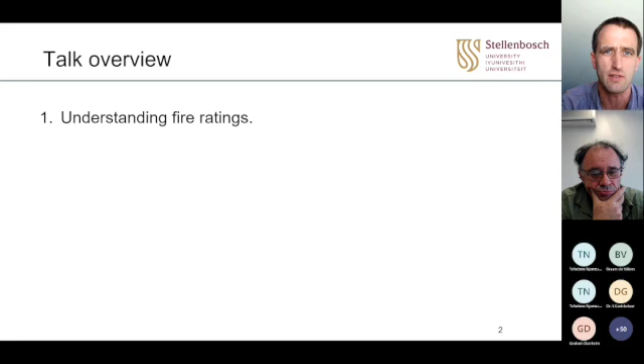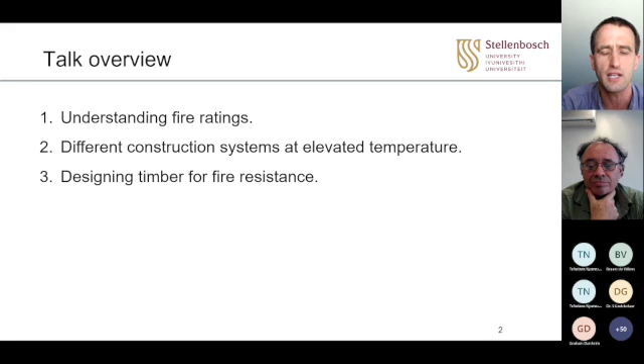So it's probably something many of you have had to deal with. As an overview of what we're going to look at: first, understanding fire ratings, because the first half of the talk is just, what is a fire rating, what are we actually trying to achieve? It doesn't matter what construction material we're using, but what is a fire rating? Then looking briefly at different construction systems as a comparison, then focusing on designing timber for fire resistance, so we can put it all in context.

In terms of additional content, we have a YouTube page, FireSUN, where various videos are available on testing and products and all sorts of things, so if you need additional content you're welcome to go have a look at that on YouTube. And we've got fire safety engineering at Stellenbosch University, with master's and PhD programs, courses, short courses, structural fire, fire behavior, fire safety engineering. We do research, consulting, expert witness, R&D, etc.

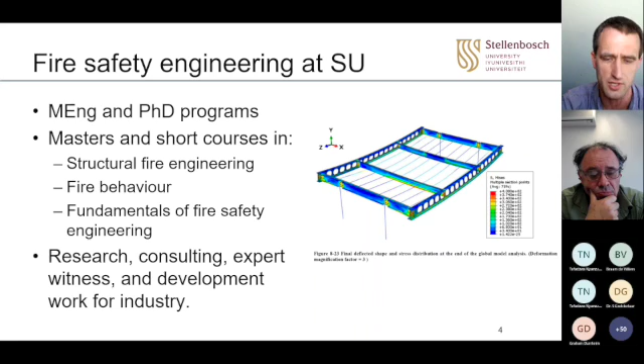As a background to this, if you want more details, a timber and fire textbook has recently been released free of charge - a free textbook on fire safety engineering for timber structures. This is written by many of the top experts in the world, pretty much the who's who in structural fire and timber, published free of charge. So you can go download that if you need any guidelines, but it's 486 pages of light bedtime reading.

So the couple of slides I'm going to give you today is a really, really fast introduction to a fairly detailed topic, but there are extensive guidelines being produced to help this issue. Firstly, my background is a structural engineer, and I know on these sorts of projects, as soon as you have timber, you have fire, the structural engineer says, well, that's not my job.

Yeah, that's the fire engineer's job. But if we have a look at the codes and standards, when it comes to structural fire resistance, making sure the structure has sufficient resistance, the fire engineer is involved with that in terms of specifications.

But our code that specifies what the structure has to do, SANS 10160, is the code of practice for structural design. This code specifies that we should design for accidental design situations, and accidental design situations include fire. So when a structural engineer signs off a building against SANS 10160, our loading code which specifies winds and everything, it actually has fire listed in there.

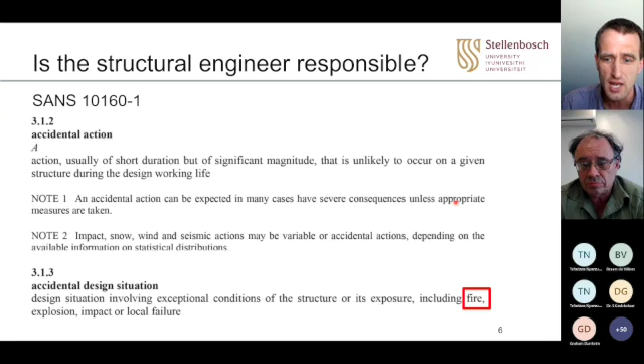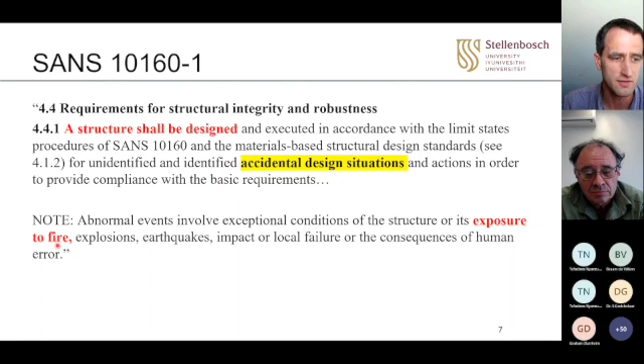So most structural engineers don't even know this, but they should be checking these structures for fire resistance. It's considered what's called an accidental design situation, and a structure shall be designed for it, including exposure to fire. I'm not going to read everything else, but you should realize our code of practice for designing buildings says the structural engineer should design for accidental design situations, including fire. Most structural engineers are not doing this, but it is actually a requirement of our code.

And it's even listed under the accidental limit state. We normally design for what's called the ultimate limit state - this is one of the ultimate limit states. In the case of fire, the structural resistance shall be adequate. So it is a requirement - fire resistance must be checked.

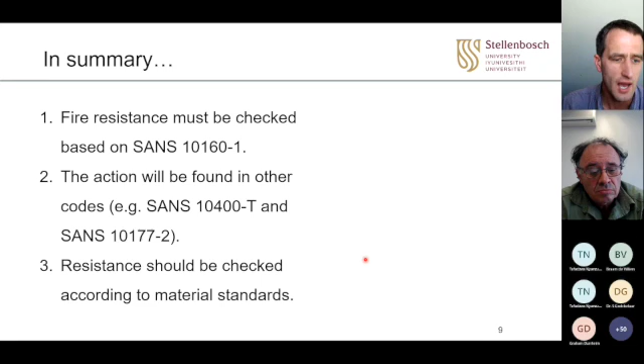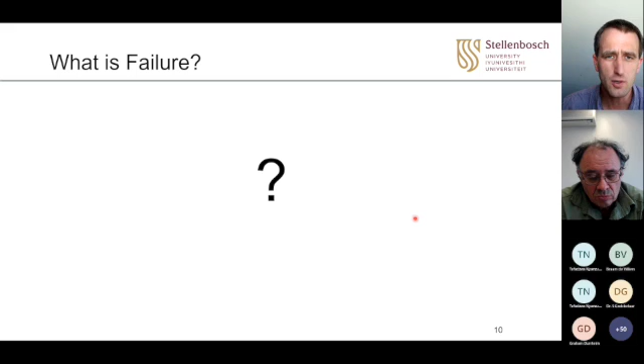So you're actually allowed to have damage. If a fire breaks out and spreads, you are allowed to have damage, even to the point of knocking the building down possibly. But the issue is you're trying to make sure no one dies, the neighboring buildings are kept safe, you keep the fire where it starts, and you limit fire spread.

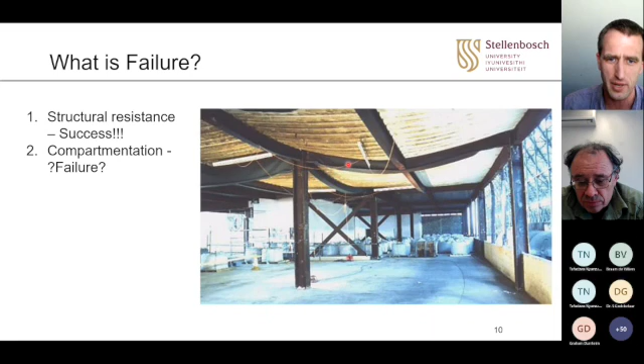So this would be a pass - this is fine in terms of structural resistance if your building looked like that. This is a steel building, similar situation for timber. But for instance, if this happens to your building, the fire will spread if big gaps open up under walls. So we've got to have a look at what is failure.

There are a couple of criteria spelled out in the codes - our building code for fire 10400 part T, or the testing code 10177 part 2. We need to satisfy stability, strength, or structural resistance. So we've got to make sure everything can carry the load after a period of time.

We also have to make sure that integrity is maintained. The passage of smoke and flame through the slab must be prevented, or wall, or whatever it is. So we must make sure, even if it's strong enough, if it cracks and flames and smoke pass through, it's a problem. Then also we have to make sure we satisfy insulation criteria.

This limits the amount of heat allowed to pass through the slab or beam or whatever it is. The average temperature rise on the upper surface may not exceed 140 degrees Celsius. So even if you've got something strong enough that prevents flames from going through, for instance steel sheeting, if it heats up too fast on the unexposed side, it fails. So we've got to make sure elements satisfy stability, integrity, insulation.

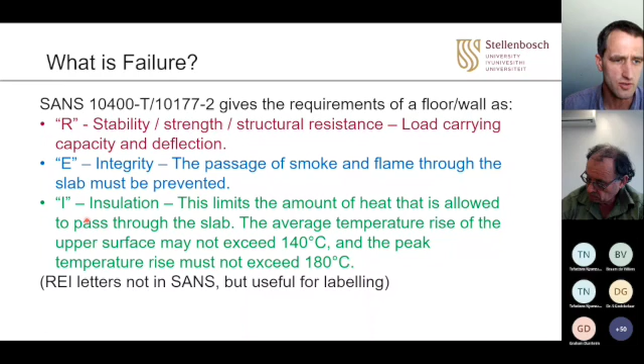Those are the three main requirements. So that's our stability or load-bearing requirement - is it strong enough? Integrity - is there a crack that flames can pass through? And insulation - does it get too hot on the unexposed side?

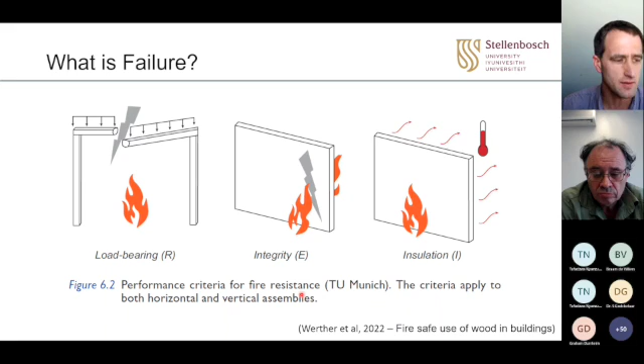And so all of these you need to make sure you satisfy, depending on whether it's a wall, slab, beam, or column. So now we have ways of testing that.

You run your furnace following this curve, but it doesn't actually mean that a 30-minute fire rating for a beam or column means it'll last 30 minutes in your building. It could fail after 20 minutes or 4 hours and still have a 30-minute rating. It's 30 minutes of a specific fire, and it's a bit of an arbitrary fire, based kind of on the way that 3 guys could shovel coal into a furnace 100 years ago. There are other fires, the hydrocarbon and external, but the main one is the standard fire.

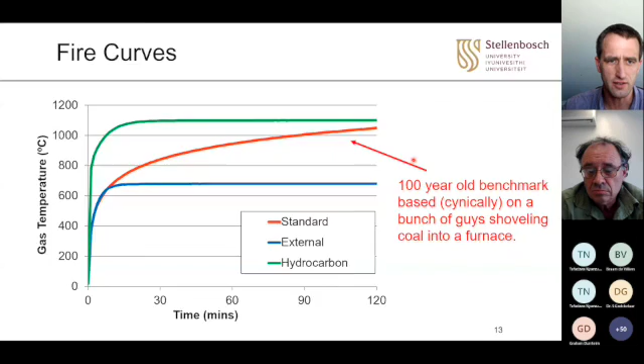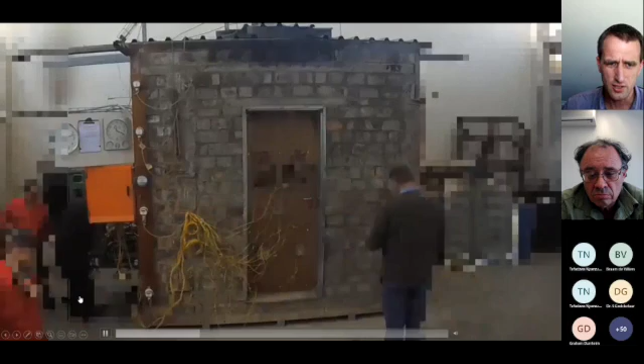And so this is how you test it. This is a furnace, this is at Ignis, and this is a door test. You will see here that it was put basically in a furnace, a big box, with burners at the side pumping in hot gases, and it's exposed to it. Then you see an integrity and insulation failure - the smoke and flames are coming through. It's heating up on an unexposed surface, so this would be a failure.

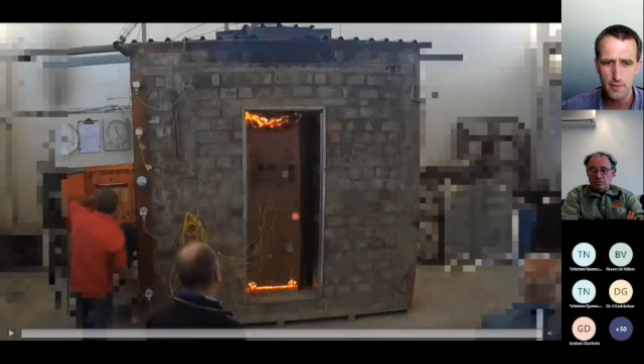You could put in a wall panel, a bigger wall panel. You could put in columns or beams inside the furnace, and use this to assess how long a sample lasts - does it obtain a sufficient fire rating? There are ways of calculating it, which I'll show you soon, but that's what we're trying to make sure - that a certain amount of time is satisfied for that.

Because as I said, it is different. A real fire has growth, flashover, fully developed decay. It doesn't go through that. So it's a bit of an arbitrary curve.

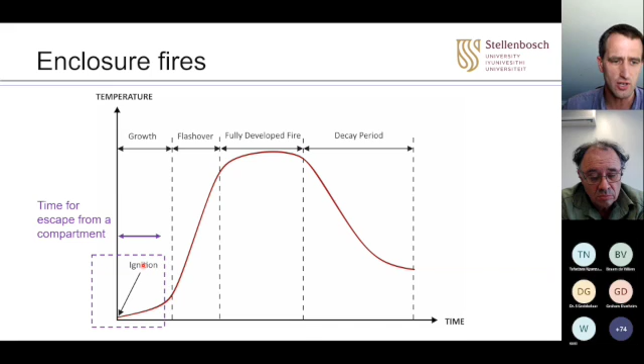Normally what we are trying to make sure is that time to escape is actually before your structure is damaged. There's ignition, and then the fire slowly started growing. This here is where you want to get people out of the building. So if you've got 5 or 10 minutes, this is to get people out - it's not about how strong the structure is. At this stage, the structure doesn't even know there's a fire there because it's not hot enough. The standard fire curve is kind of after it's fairly well developed - that's sort of what it's mapping out, the standard fire, that dotted red line.

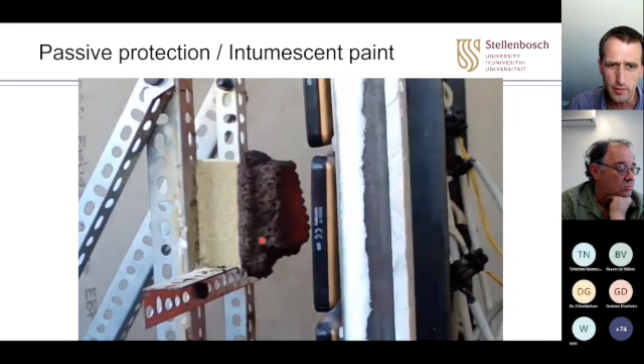So now let's have a look in comparison - what do other materials do? For instance, different products you will typically protect with an intumescent paint. This is a paint and it swells and provides a char layer. You would put this around steel, or sometimes even concrete, sometimes timber - I'm a little cautious on the timber, but it can be done. You use this to protect the material and give you extra time, additional fire rating. But this stuff is expensive.

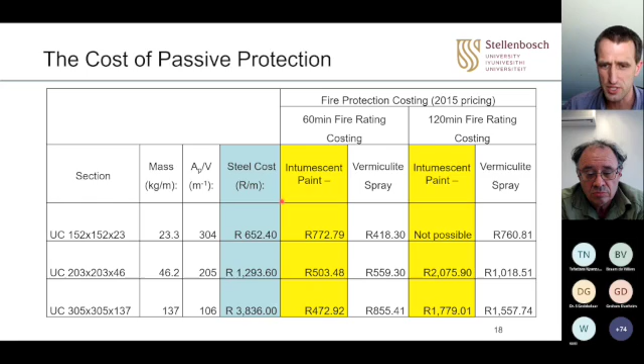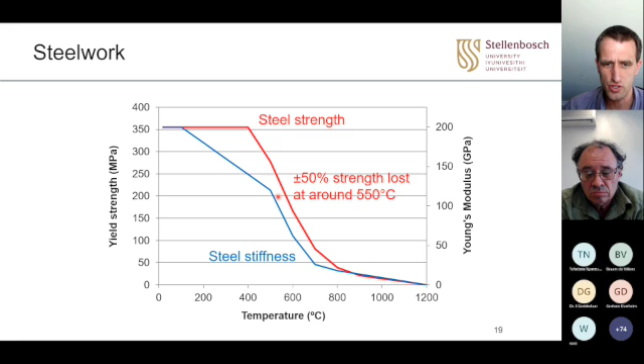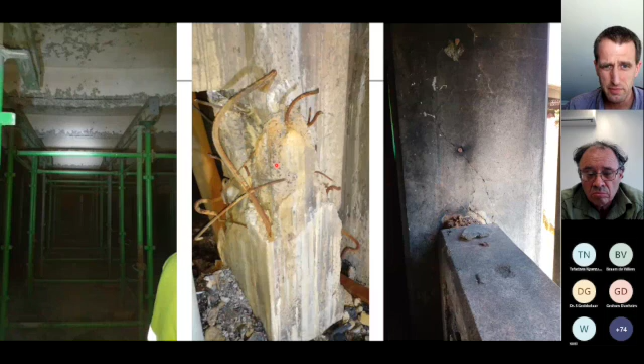Concrete as well - concrete normally survives well, and I'm doing this so you can then look at timber in comparison. But failures do happen - this is a concrete column that has failed. What happens is, for instance, there was a big compartment, fire broke out.

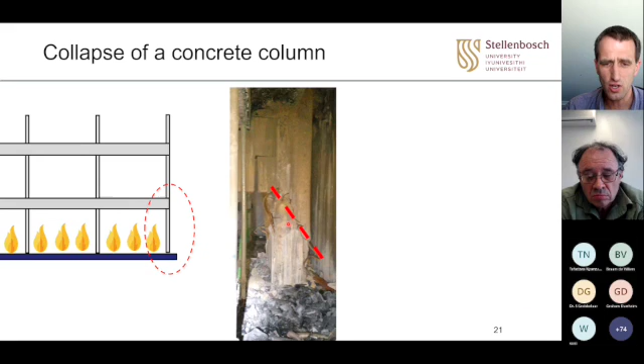We're looking at this column, and it expanded. The fire heated the element, and it actually sheared the column through. So you've got a 500 mil by 500 column. This is big, lots of rebar in there. The thermal expansion actually is what killed your structure. It actually cut through that column.

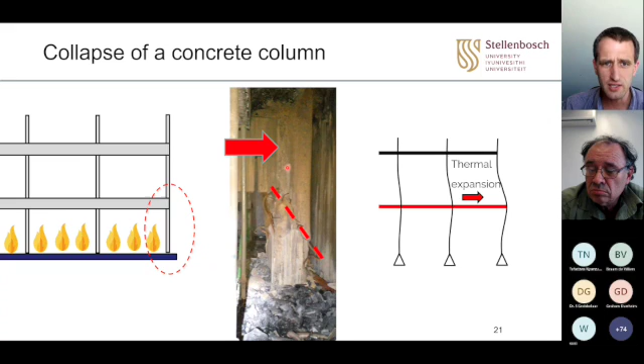So different structures fail in different ways. And the thing is with timber, it doesn't heat like steel does. It's not thin, and it doesn't expand like concrete does. It's a different way we design.

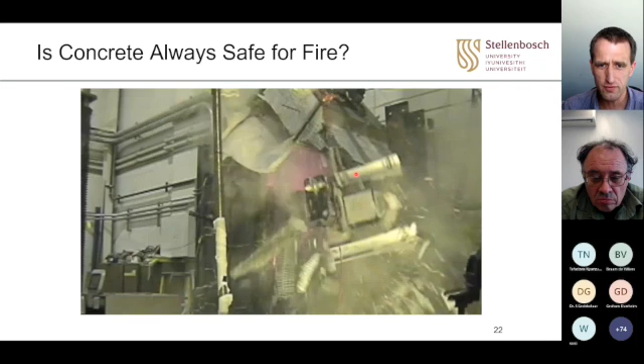Also, concrete is normally assumed to be safe, but you can't necessarily always assume it to be safe, especially with modern products. If you've got high performance concrete, this is concrete blowing up, or if you have post tensioning, various other things, you've got to be a little bit careful with your fire resistances.

So now let's get into timber. I mean, you guys are now all probably timber experts, and we've had this big drive to use timber in timber high-rise buildings. One of the biggest challenges to the use of biomass in construction is fire safety. It's a major headache. I understand the durability issues and moisture, etc. In terms of approvals, the fire department has a heart attack. You go and say, hey Chief, can I build a 10-story timber building in downtown Cape Town or Sandton? The fire chief is probably going to have a heart attack.

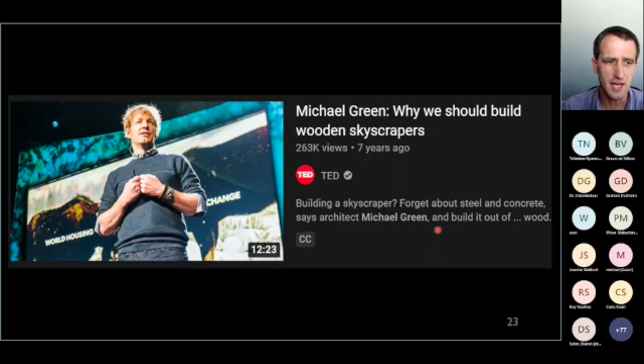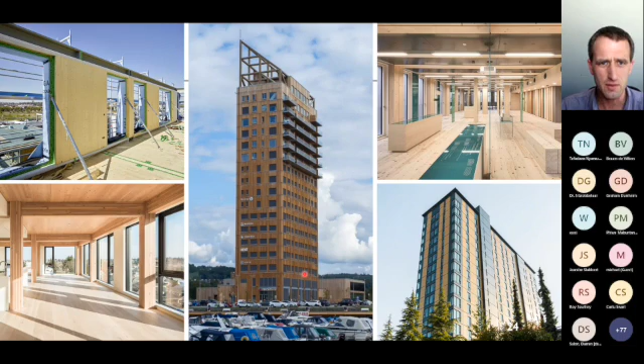And there's various things you have to think about, and you've got to look at it holistically: your detection, your suppression, your durability, exposure, etc. I'm just borrowing some slides from my student - he's about to graduate with a PhD. We've got a couple of people, Darren Sulon, Marika Duplessis, and another MSc student, Sipapelo. They're coming through, doing postgraduate studies in timber and fire. So we've got a nice strong team doing this work.

When it comes to structural fire, you've got your low-rise buildings: post and beam, low-rise, single-story, multi-story, and mass timber - large solid wood panels, walls, floors, roofs. This is the area where structural fire really gets involved in design. Most of these systems, you're looking at cladding - you put boards on, basically protect the timber, make sure it doesn't get exposed to the fire, and keep it safe that way.

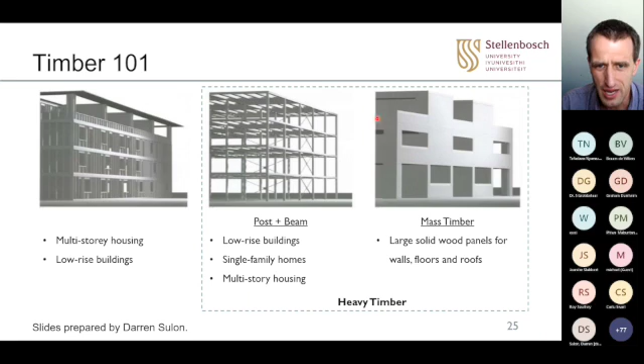With mass timber, we may leave it exposed - this is our timber. To some extent you do it there, but whenever you have light timber, you clad it. When you've got heavy timber, you can start looking at charring and design.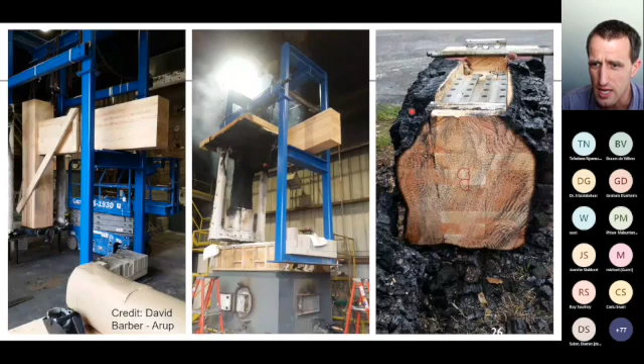You'll see that material has been lost - material is gone. This is the column here, but you'll see there is a residual cross section. There's material left over that can still carry load, and we are relying on this middle section to give us the strength. Yes, we've lost timber on the outside. Yes, we may have to strengthen the structure. Yep, it's burned. But if we've done it right, it can still be strong enough.

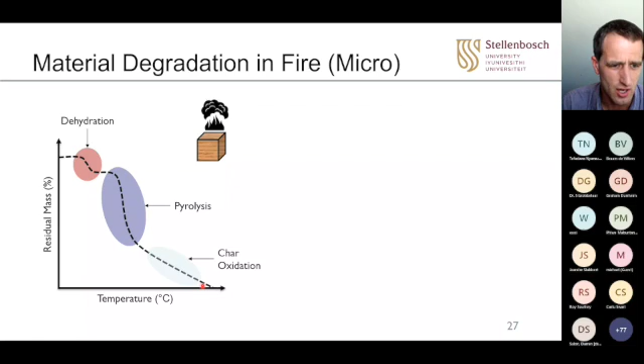Because what happens is if you've got a little block of timber, there's your residual mass, there's your temperature. It's going on - first it dehydrates, so the moisture starts coming out of it, and then it starts having pyrolysis and basically combustion, producing gases which can burn. So then you start getting flaming, and then you've got char oxidation. We are relying on this oxidation layer, the char that forms, to protect our structure.

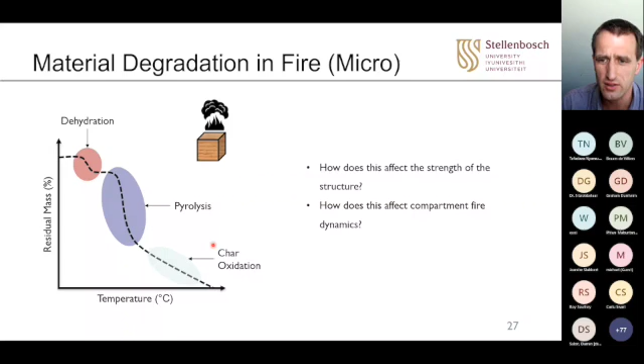So how does this affect the strength of the structure? How does it affect the compartment fire dynamics? So is it strong enough, and what happens?

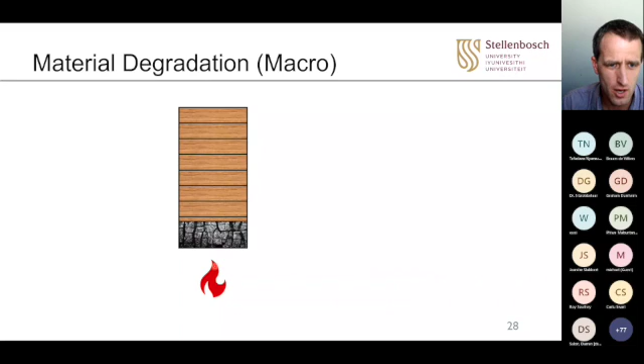So here are some layers of timber. Here's the fire from below, and now it chars. We have a reduced cross section, with a char layer in front. If you look at the temperature through the section, you've got charred, then heated but uncharred, and then the remaining residual section.

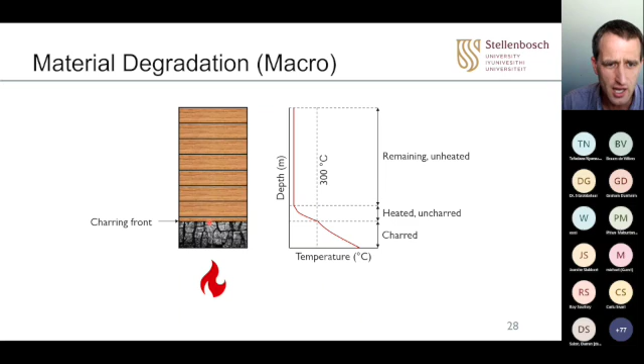We assume everything hotter than 300 degrees Celsius has lost its strength, then there's a transition, and then it's got its full strength. So we design for that - we lose the char, we lose our heated layer. I'm not going to go through this example in depth, but I want to show you there are engineering methods you can use.

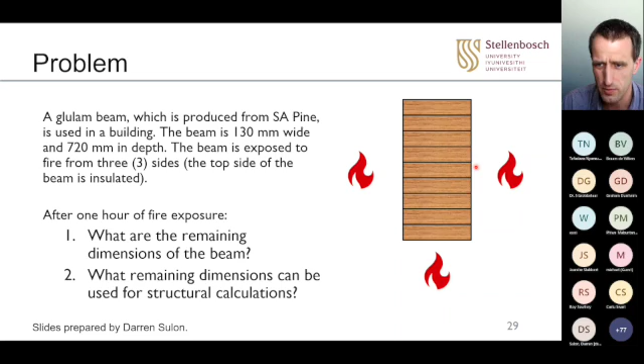For instance, a glulam beam produced from SA pine is used in a building. It's 130 mil wide, 720 mil deep, exposed to fire from 3 sides. After 1 hour of fire exposure, what are the remaining dimensions that can be used for structural calculations? You need to know how fast the char front moves, which depends on the species, and what is left over.

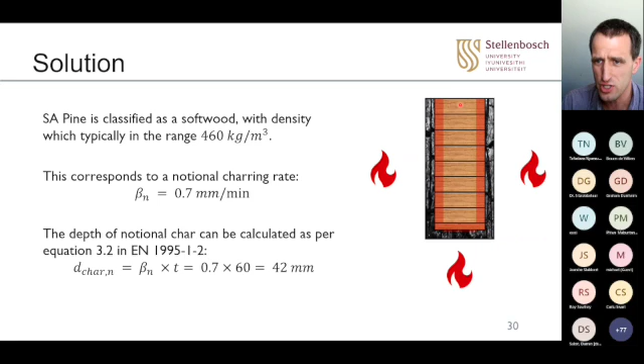So there are some details you go through - you pull this up, find out you lose that char layer, you've got a heated layer, and you have a residual section that you design for at the end. You go through the calcs, etc., and end up with that section in the middle.

One thing that happens is in the fire limit state, you design for lower loads. For most buildings, you design for the worst event in 50 years - like when you're moving offices and pile everything high in the corner, the highest loads you can get. The chance of that worst event happening at the same time as a fire is very low, so often your design loads can be half.

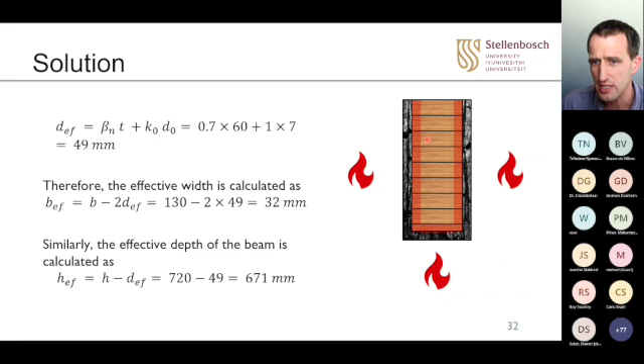So even if you have lost strength, it doesn't need to be as strong because it's being designed for a lighter event. You lose material, you've got a lighter event - maybe you need a little extra timber, maybe you don't - but you have a residual cross-section that can carry the load.

You do have to be careful, though, especially when using engineered timber, because you can find char fall-off. You've got layers stuck together, and some adhesives are better than others. For instance, this is SA pine.

We've done testing with SA pine - these are both pictures of SA pine - but we also did eucalyptus. You can see how it chars, then gaps open up, the fire penetrates through, and eventually it'll get through. But we got basically an hour fire rating on some of these samples - I think we even got close to 90 minutes on the eucalyptus. So there's work that's been done to look at the fire resistance of these systems, and you can get it. But yes, the timber is charring.

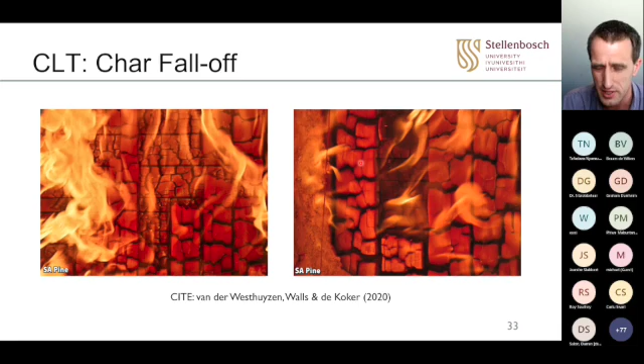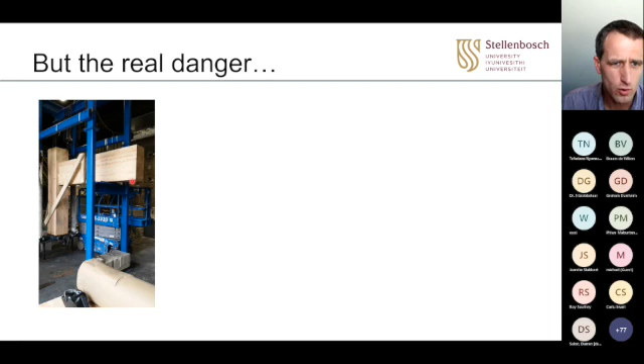The real danger, though, and this is something you should think carefully about, is your connections. You can design that timber to work, make sure you provide some extra char - it works. But if you look at buildings around the world where real fires have occurred, buildings don't collapse because the fire resistance was 61 minutes and should have been 75 or 90. Buildings fall down because of connections - connections are always, or almost always, the first thing that goes. In a real fire, when things start moving around and get hot, it's these connections that fail. This is where you need to be careful and make sure those connections are protected.

For instance, this work used an intumescent sealant, the sealant I showed earlier that expands. So if the fire tried to penetrate into that joint, you block it. There are some guidelines in the different documents, but you want to make sure these are safe - you want to protect these to put everything together.

This is the same thing even in timber trusses. A timber truss gives you a little bit of resistance from the timber members, but what fails in the trusses is those gang nails, the connectors. Those will give you a couple of minutes because they're steel - they heat up, they char, they pop off.

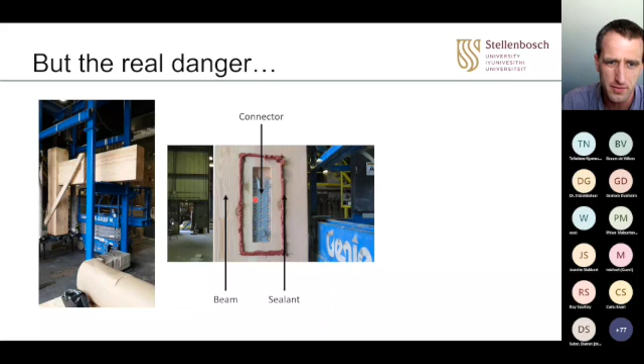So you will maybe have a 3-minute or 5-minute fire rate on a timber truss, where the timber itself, it's the steel that fails before the timber, or where the steel's anchored. So you want to make sure that this section at the end of the day holds out, and put some time and effort into engineering that.

Another thing that is starting to now come into codes, and this is a topic of ongoing research, is that, for instance, in a normal building, let's say you require 60-minute fire rating. That is based upon fuel loads, how much fuel is in the building and how fast will it burn. But when there's timber, the skeleton of the building, the beams, the columns, the slabs, etc., contribute to the fuel load. So you also have to start asking, is a 60-minute rating now suitable?

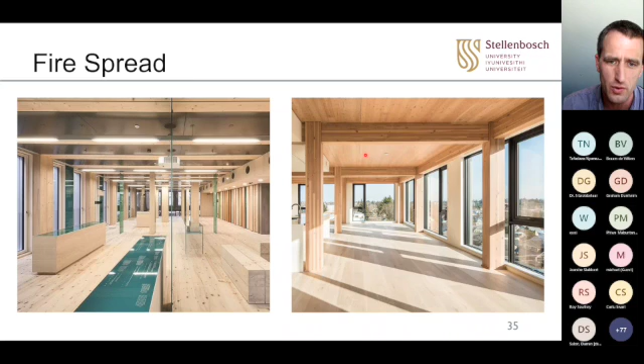Do you need to increase the fuel load in the building? Now do you need to design for a 90-minute fire rating? Or what some codes recommend is they say you have to clad a certain percentage of the columns and beams, and that's to reduce the energy being released, to reduce the intensity. So yeah, you can have timber, you can have some exposed timber, but you can't have 100% exposed timber. You end up requiring a certain amount of cladding to it just to reduce the maximum heat release rate, how fast it burns. So these are things to think about, and those are the sort of things that go into these high-rise engineered buildings around the world.

So just a couple of final notes. I've been through quite a lot in a short period of time. So fire ratings can be obtained, but charring is key.

You're designing for material loss. For steel, you're protecting it. For concrete, you're insulating it with cover. For timber, you're designing for char. It doesn't expand, it doesn't move so much as the other materials do, but you lose material and you would have to replace this. But normally fires are so rare that you do accept, all right, I'd have to replace some material.

Timber chars at a predictable rate, so you know it'll be there, you know it will provide a certain resistance. It's a robust thing. However, connections are the most likely reason for failure and collapse. Doesn't matter what type of construction system you're using, connections are always key. When a building falls down, it's most of the times the connection or near the connection where failure occurs.

So these are things you have to look at. And then heat release rates and fire intensity increase due to the presence of exposed timber. Some codes limit the exposed area of timber, so guidelines are currently being produced. There are various organizations that are sponsoring, like Arup, sponsoring large-scale fire tests and others to try and understand it.

Now, fire departments are not going to love you initially. It's not a well understood material, and you must understand fire departments are quite cautious. They don't want to approve something that they think may be a risk. So there will be a series of engagements in the coming years.

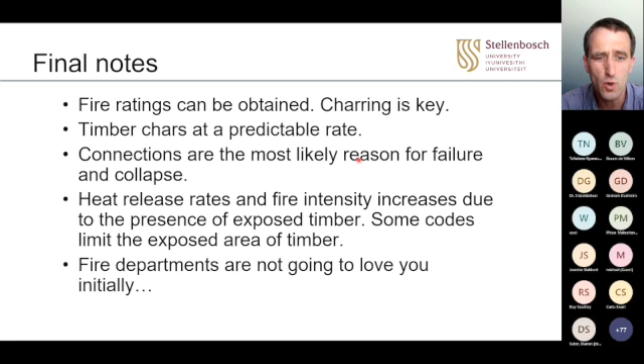And just taking you through firstly then, how does fire resistance work? And then we had the furnace testing, making sure we design for it. And so yeah, that takes me to the end of my discussion.

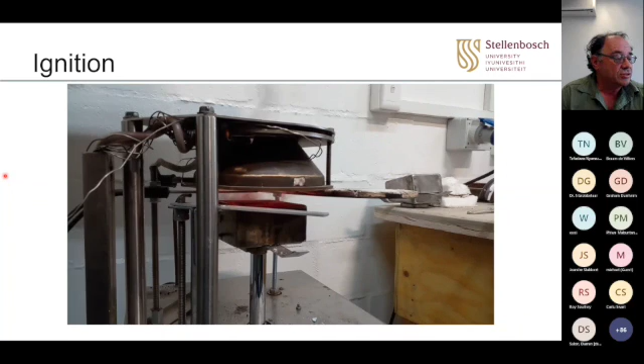So how do we do that? We must go into calorimetry of the material and understand its behavior. This forces us to use physical properties such as energy in joules, power in watts, heat flux in kilowatts per square meter, and the reaction to the three modes of heat transfer. Temperature on its own is not enough—zero degrees Celsius is not zero anymore.

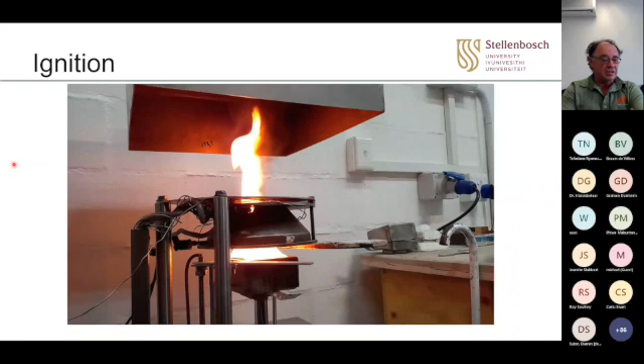This is where apparatus such as a cone calorimeter comes into play, and for the time being is the only real bench test around to produce the required results. With that piece of equipment—however simple it might look—it's quite involved in terms of chemistry, physics, and measuring oxygen depletion to get the final results. But we do get very good results out of that, and we'll show you a graph later.

If you look at the heat release rate in kilowatts per square meter for that material, say even for timber going up to 200 kilowatts per square meter, then if a door face starts to flame, which is 2 square meters, you suddenly have 400 kilowatts of power, which is quite a lot. That is, if you do fire testing, you realize when a door skin sets alight how much the

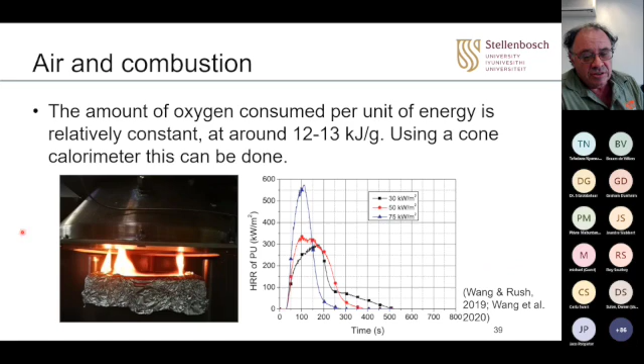As I said, in future research, my view is that we will have to look at something similar to a CCA product that we can impregnate the timber with to resist flaming. If we can resist early flaming in timber, I think we can get to a winning type of product or way of preventing sudden high energy or heat release or heat flux in timber structures.

The problem with that is not only the structure itself, but if you have a sudden high heat flux release, you set alight other products in the building that might not have ignited at a lower heat rate, contributing to the total fire load.

To conclude, I don't know where the secret completely lies in timber, but I know we must not stop searching. And it is for this reason that I think we have to thank people like Prof Walls and Prof Wessels for initiating this research into timber and timber fire, and we would appreciate any contribution to this field and to supporting fire resistance and how to do it, and also that we have to initiate more testing, more pure thinking about timber and fire in structures.

So yes, Richard, I think the industry must be highly appreciative of the action you took about 6 years ago with your fire engineering research unit, and the way that we could have assisted you with tests, and hopefully in future do more tests and also get improved test methods to enhance timber, and not only timber, but all flammable materials in structures in future.

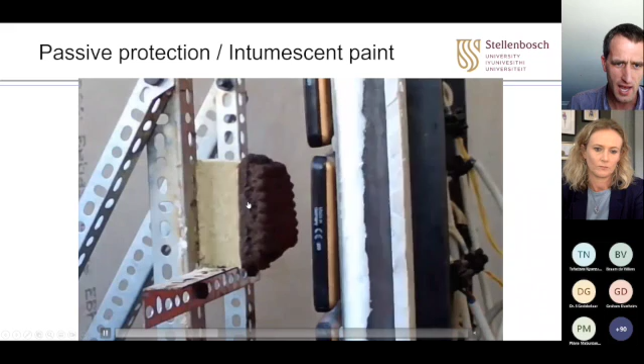If by that stage the timber on the back is starting to char, this could actually peel off and fall off. So you'd want to make sure that the Intumescent has been tested and what it's saying. You really want to get hold of the material. If you put enough of it on and it stays bonded, then it will provide additional resistance. Yes, that's its job. The big thing is, does it stay bonded?

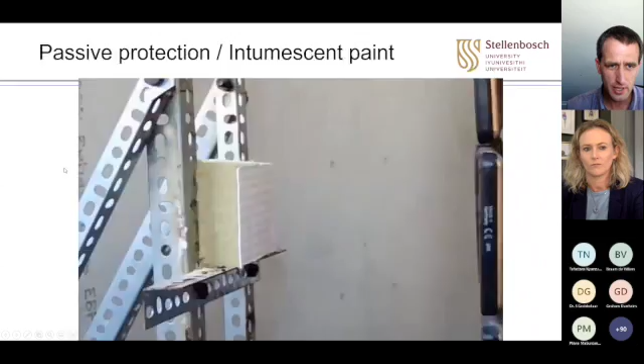Could the chemistry of the burning timber influence the intumescent? I don't have categorical answers to that. I haven't looked in depth at the latest and greatest. The textbook I showed you earlier, hopefully they've got the latest results. Go get hold of it, it's free. Have a look through.

Do residential buildings in South Africa require a structural fire rating? You will find that there is a minimum rating. Roofs, not really. The new version of 10400 Part T is badly worded, in my opinion. I'm on the committee, but hey, it's a bit misleading. So for roofs, you can kind of get away without the fire rating, but especially your boundary walls, your compartment walls, walls between your garage and the rest of the house, there are certain ratings required of sections of your house.

So you'd have to go through and check, but no, it's not necessarily every single element. Often, most roofs in the country are not fire rated. Every timber truss with gang nails or connector plates is not fire rated. But the same thing applies to all light steel frame structures, all steel. Steel heats up and fails in 8 to 10 minutes, the light steel trusses. So just because it's not combustible doesn't mean it's fire rated. Most roofs do not have it, and you'll find that discussed at the bottom, I think it's table 5 in SANS 10400 Part T.

Could you elaborate on which types of glues have been shown to perform better or worse in fires? Depends, you have to look at the glue. So your polyurea, polyurethane - sorry, the glue expert Brandt just cringed as I said that. We even were testing with him. There's been testing Brandt's been involved with recently. That tends to melt, and there are other ones that are available, so you'd have to have a look. But the polyurethane is easier to work with, so it's liked.

I just want to point to something to make clear. One of the things people often worry about or misunderstand is you get different types of tests. For instance, a material can burn and a material can release smoke and gas. That normally is a greater concern in the smoking, flaming and fire spread in this initial phase, we're trying to get people out the building. So you can have a material that flames plenty and can reduce your evacuation time, but you can still get fire resistance. You've got two separate types of tests. One is what does it contribute to flame spread? Timber actually doesn't flame that easily, it has very low flame spread.

Synthetics are all oil-based, your curtains and nylons, they spread like hell. So you've got your reaction to fire, which covers the early bit, and then you've got your fire resistance. Fire resistance is how long a piece of construction material survives in a furnace test, that's what your standard fire resistance test is looking at. It doesn't matter if it burns or not, if it releases energy or not. You're comparing it against a benchmark and how long it satisfies integrity, structural resistance, and insulation requirements.

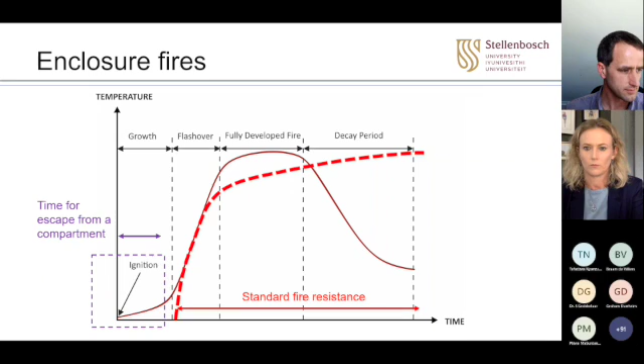Brandt, you'd like to say something there? Richard, maybe I'm not sure whether you or Dirk will be the best to answer that, but I was thinking, you both commented on roof trusses that might not be fire rated. If you use wood trusses and the small nail plates are the problem, would something like normal nails or bolts be a better option? I don't know if you've tested stuff like that, maybe Dirk?

By experience, if one goes back to the past where roof trusses were nailed together, that is still, I suppose, one of the best bonds. But in terms of modern day design packages, the way they do it, and the ease of construction, the fact that you have an inline structure with the plates, I don't think that will go out, but one will have to maybe consider a nail through the plate, or the plates in both members of that joint. So yeah, I think that would be the best consideration to do. But I suppose we don't want to go back to overlapping and having 3, 4, 5 nails through it. But that is still a very good joint.

I think one of the points also is, do we need a fire rating on a roof? Mostly not. Mostly, if the roof collapses, it actually provides a vent and the flames go up rather than to the rest of the house. So roof failure is not necessarily the end of the world. It may actually be a good thing. And normally your roof is supporting thin steel and other things, so normally your sheeting and your tiles and everything else has failed long before you as well.

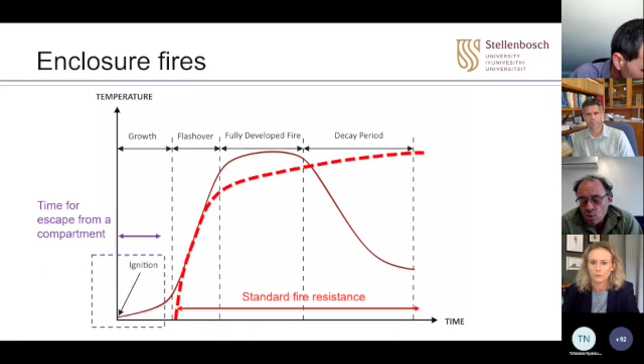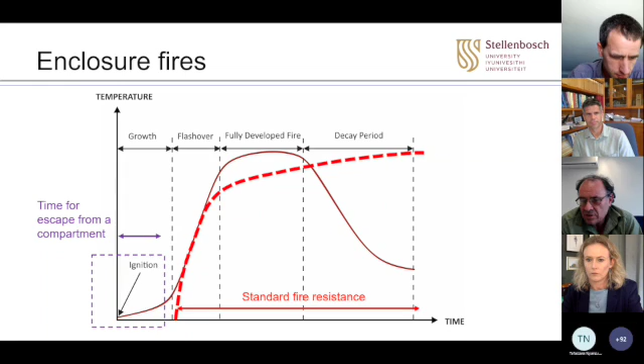We did do some tests with Wood Safe and a number of other products. One comment I can make, referring mostly to doors, it's never the core itself that's a problem. It's usually the detail around it, around your rebates, your locks, that is a problem. It's hardly ever that I see a problem with insulation, for instance, and even integrity if it burns through the rebate. So there's a lot of effort that must go into attention to detail of design rather than only surfaces. But to add to a comment you made about flame spread, the first test we did in the SBI, the single burning item, we had some veneered sheets lying around, particle board sheets with veneer on, and we saw no flame spread on that, nothing.

Sorry Darren, do you want to make a comment? Darren, you are able to answer the question? Yeah, do you want to make a comment? Yeah, my main comment is products like that mainly deal with reaction to fire. So like Dirk said, it'll help you with flaming, but it's not going to change your structural fire resistance.

This is the issue there. Darren's just wrapping up his PhD in structural fire, so that's what I've been pointing out. It depends on the product, but it could be one with various salts or silicates, etc., that impregnates into the wood and reduces the combustion reaction. So it doesn't make it non-combustible. I've seen some videos like, hey, timber doesn't burn anymore if you put on this stuff. I'm like, yeah, okay, I'll believe it when I see it.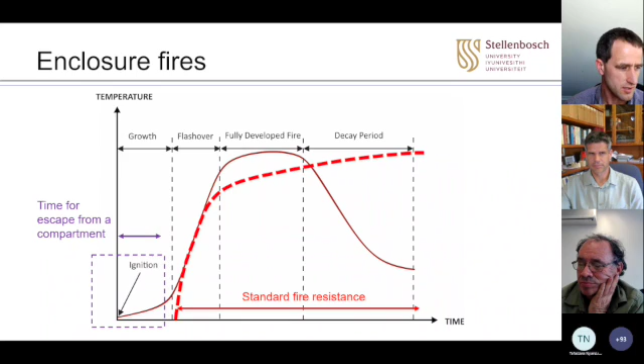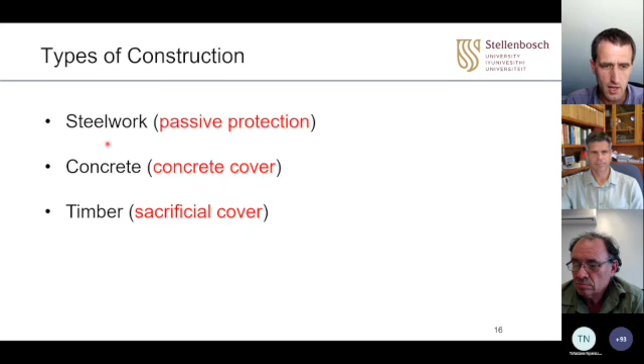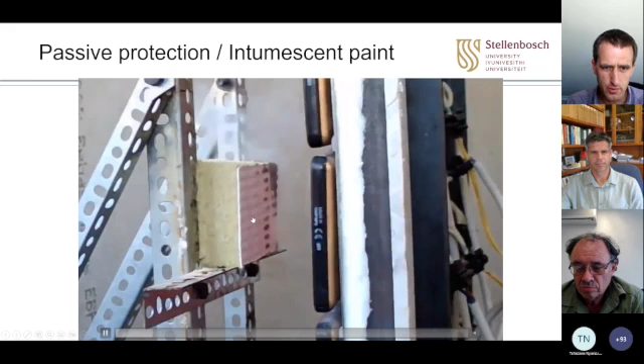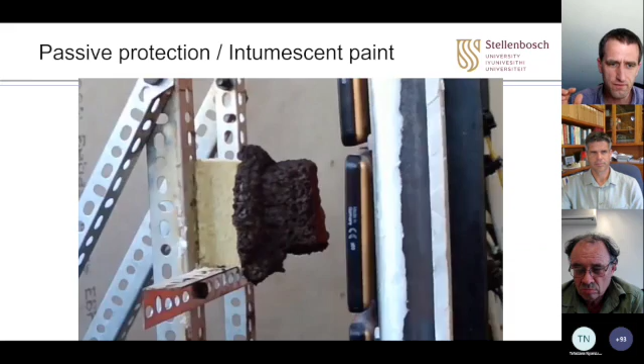You get your typical iron oxide paint, if you're talking about that, that's just a primer you put on steel, and that has no fire resistance - that's just a primer. If you are talking specifically about intumescent, those are what I showed earlier - it's one of these products, it has to expand. Something like this - a paint alone needs to provide a thick char layer. I'll be perfectly honest, even putting this material on a purlin normally doesn't work. Light steel, anything lighter than about 4 millimeters, you probably can't protect economically with the paint. You normally just allow your purlins to fail. They are thin and they're supporting 0.6 mil sheeting, so the sheeting is going to get stuffed in no time at all. So normally your purlins have zero fire rating, literally a couple of minutes. So I'd be cautious if someone tells you they have fire rated purlins. If you are talking about steel versus timber, then I'm not sure - I mean, then you can have products, and that's what we were discussing earlier. You can have products that prevent flame spread and slightly increase the resistance, but you have to be cautious of it. Is it effective? Well, it depends what product is being referred to.

Any more questions or comments from your side, Brunt? Yeah, just one more thing - Michael asked about whether there's enough or more data coming out. There is actually one study that we forgot about, and he's actually involved in that. So we did test CLT specifically for fire resistance, and we did tests on the different adhesives that you can use, and we also tested a boron product that you can impregnate and see how effective it is in resisting fire. But the results - it's an MSc study, and the results, or the thesis, must still be finalized.

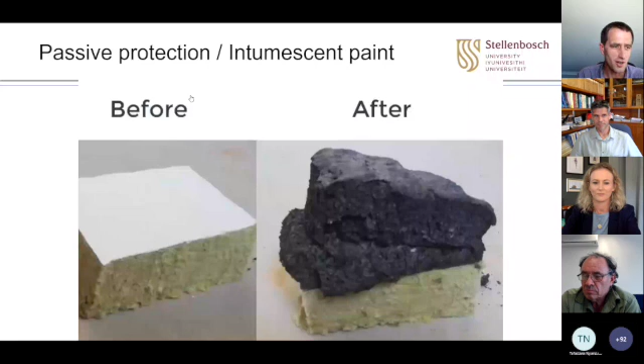Give a link to download the handbook. I shall try to do that now. I'm going to stop presenting because that's the only way I'll be able to answer that question. Otherwise, just search this name and it'll pop up as the first thing—search fire safe use of wood in buildings. I'll try to find it, but if someone else is at a computer, please post the download link. I'm managing two screens here.

Anyone else want to add something? Yes, one point I want to add is with testing, what we have found is sometimes people like to take shortcuts, and you ask them, what have you coated the surface of the door with? And they say, no, normal PVA. What we then do is take the sample, and because we have a cone calorimeter at our disposal, we run some cone tests, and you find out that somebody is not telling the truth. So I recommend people not take chances with us—we will catch you out.

The cone calorimeter is, I think, one of the most valuable pieces of test equipment I've seen around, especially for the timber industry, to get proper results and parameters that in the past perhaps weren't well understood. We use that in conjunction with other tests just to make sure what we see is correct.